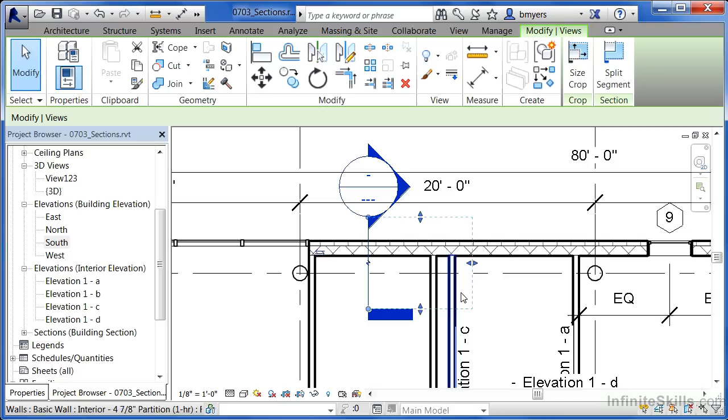Another thing of note is in order to be able to see whatever you want to see inside of the section, this dash box is going to give you an idea as to what's going to be inside of this section. So in this case, we'd be able to see the back wall as well as anything else inside of this particular box. If we wanted to see less of it, you can click on the arrows and then drag the arrows back. Now, because this back wall is no longer inside of this box, it will no longer show up inside of our section view. I'm going to click out here in space.

Next, I'm going to select one more time on this line, zoom out just a touch, and we're going to see that there's two different options and they look the same on both ends. If you click on that, it'll either remove that particular end, give that section bubble on the end, or else give you the nice thick dark line. And you could do the same thing on the other end. These can all be customized inside of the families so that this can have the look that you'd like to have inside of your own set of construction documents as well.

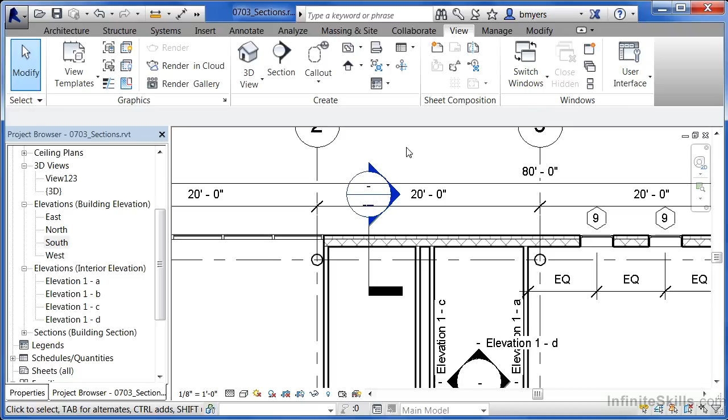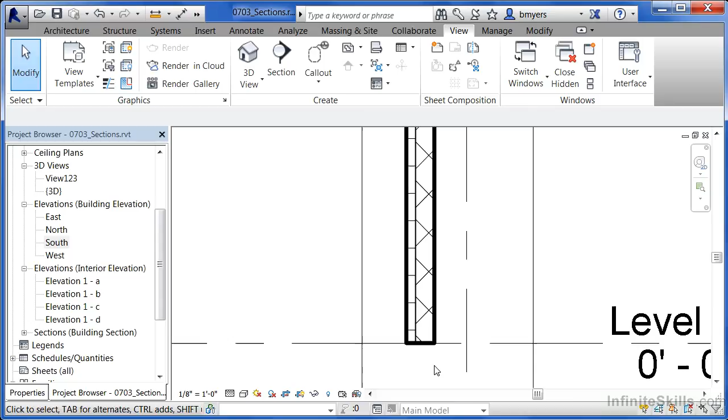Now let's take a look at this section by just double clicking really fast on the circular part of it. In this case, it's taken us to a building section that has a very low level of detail associated with it. If I zoom in a little bit, we can see that this is just some line work. But there is an option down here that says detail level. And if you change this to a higher level of detail, in this case I did a fine level of detail, you'll be able to see each layer of material that's associated with this particular item, in this case a wall. Now I'm going to click on the X to get out of this particular view.

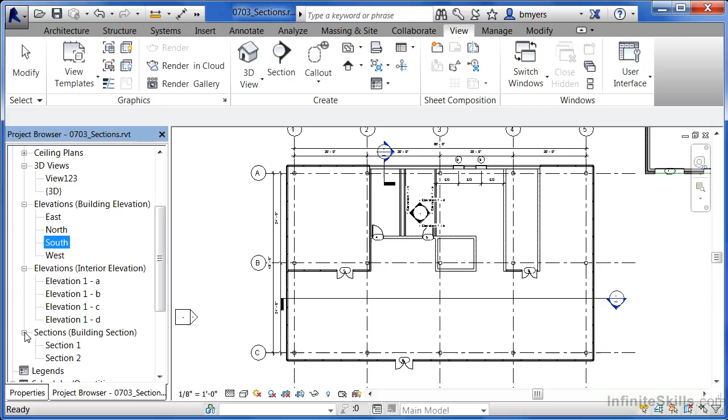Now let's do a full building section the same way. So come up here to Section, underneath the View tab, click once, move over, and click again. Hit Escape a couple times on the keyboard. Before, I double clicked where the circle was to see the view. You could still do that, but I want to point out that underneath the project browser, there's now a sections area. And if you double click where section 2 is at, that'll take you to your full building section where we can see everything that shows up inside of the section.

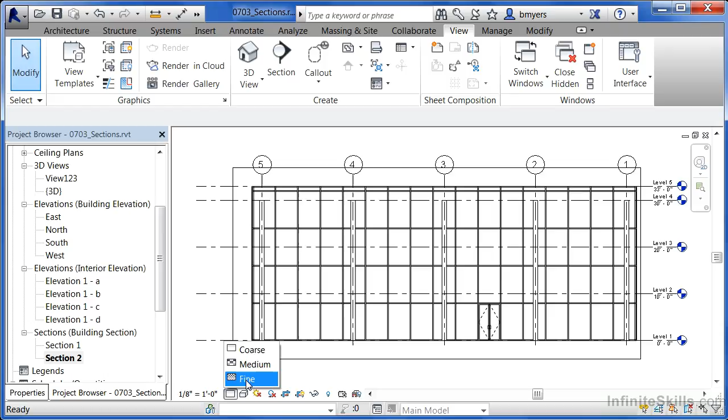And we could take the time to detail this out if we wanted to change the level of detail so things would appear slightly differently. In this case, let's try changing this to a fine level of detail and see if any changes actually occur. You'll notice that very little has changed, if anything at all. The reason is that we're cutting through very little except for the mullions and the glass associated with each of these windows inside of the curtain walls. If these had more elaborate detail, changing this to a fine level of detail may have given us more information. So the purpose behind sections is to be able to cut sections through your building so that you can see how different layers of material are put together.